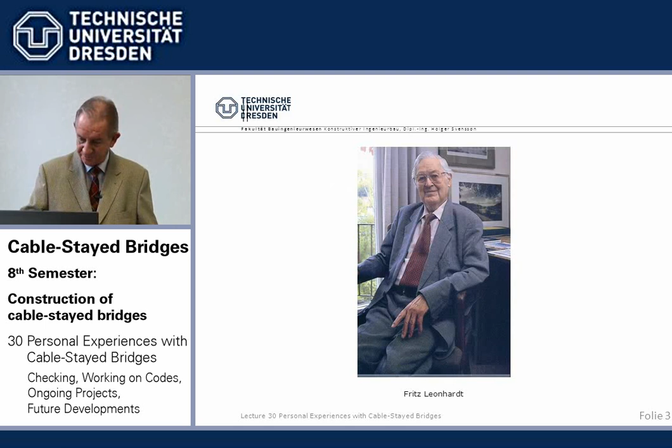Anyway, he got me a job in South Africa with a contractor there, Grinaker, who used the post-tensioning system, and I went down and was a year in Johannesburg in the design office, designing everything from buildings and industrial plants and some small simple span bridges. And then after a year, I said, okay, I wanted to go on site. And then they came up and said, we have something nice in Botswana, a black state north of South Africa.

And what was done there was a copper nickel mine was installed, and our Grinaker and Richard Costain joint venture built all the structures above ground, from rock coming out to 95% in flotation, with breakers and all sorts of things, large foundations, and it was interesting. So I went there for a year. We were 4 people running the site, 3 from England and myself, and that's how we started.

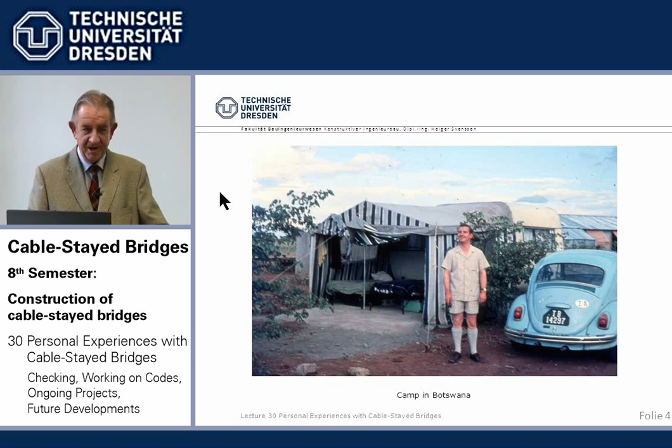First time I came up with my Volkswagen from Joburg. We started in tents. I was wearing there the usual habit, what we call a safari suit. In South Africa, I think it's still used today. So I was 25 at that time. Haven't changed a lot, I know, yes.

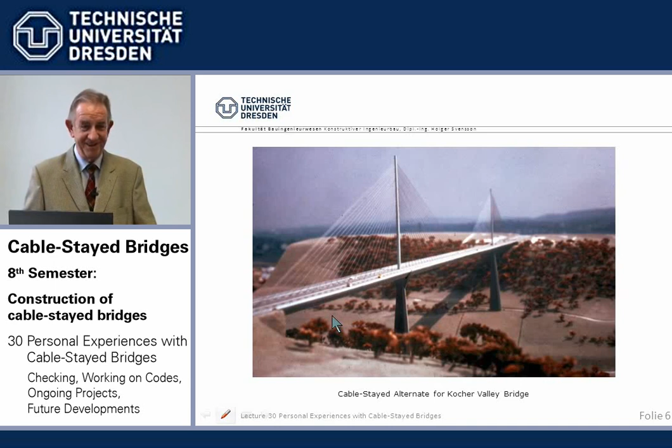And so after that year I came back and started with Leonhardt's office in Stuttgart, first on some German bridges. I've shown you the cable-stayed alternate there. I did the load configurations for stress influence lines by hand. Kernpunktmomente, I told you all about it. Since I did that for 2 or 3 weeks, I never forget it. So I worked on this one early on.

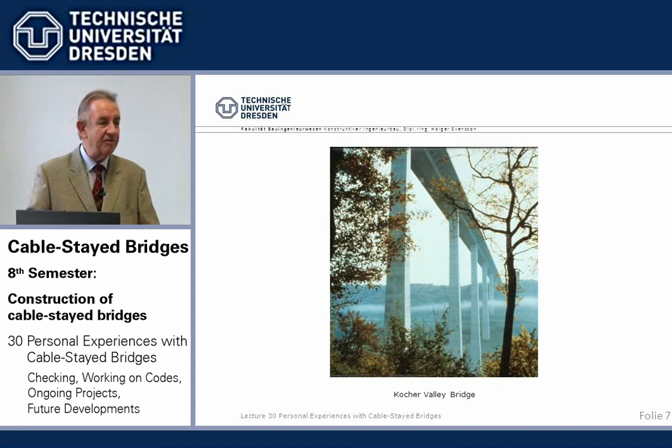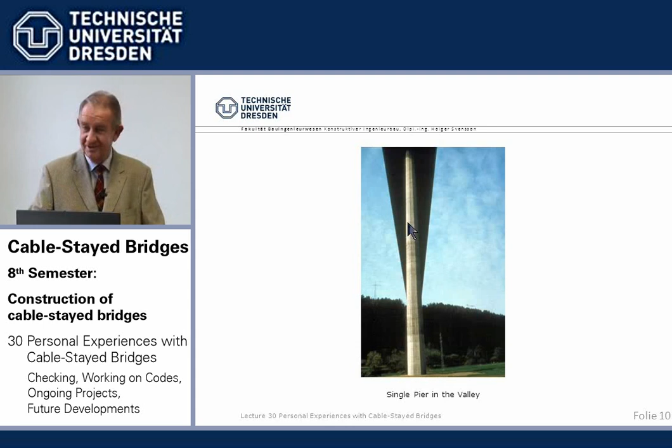Later I did most of the checking for Professor Leonhardt, who was checking engineer for the actual Kocher Valley Bridge. This one, when we could place the piers in the slope. Then came Neckar Valley, I told you, with the underslung side spans. And here we were not too happy when Leonhardt came up with doing a single pier, because we had the tender design ready, and so we had to redo the thing, but he said, no, that's important, it's a beautiful valley, we must open it up. Okay, great man.

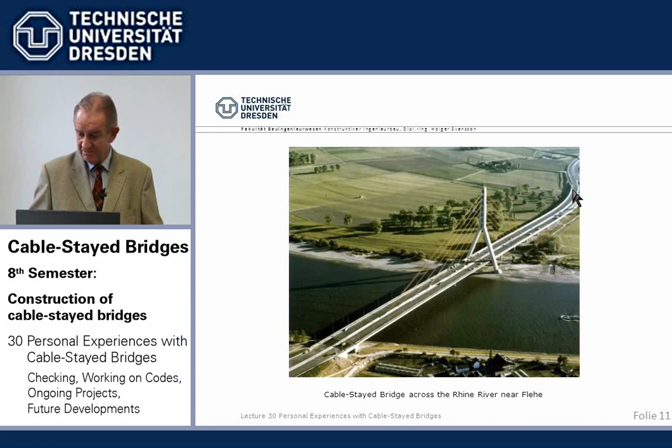Then came Flehe. We did the detailed design for this part, and I became project engineer here. Very interesting. That was built span-wise with 60-meter spans with a self-launching truss. We see here the tower is half up, and some of the engineers which are still busy, and I have contact. For example, the steel part was Professor Weyer, Dortmund, and Professor Albrecht in Munich, where my son did his diploma thesis. They worked on the steel part. I worked on the concrete part. It's all early 70s, long time ago, but one keeps in contact.

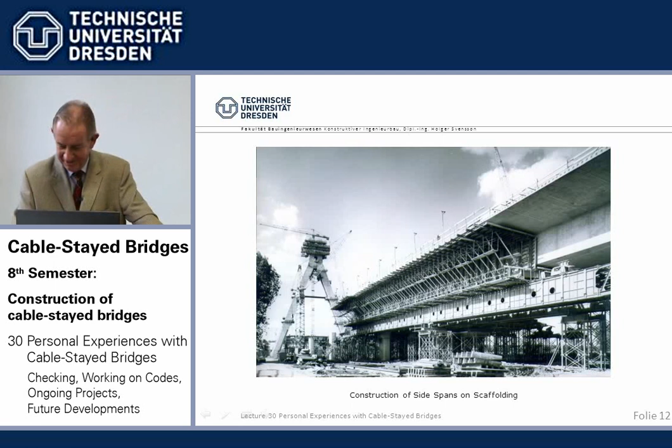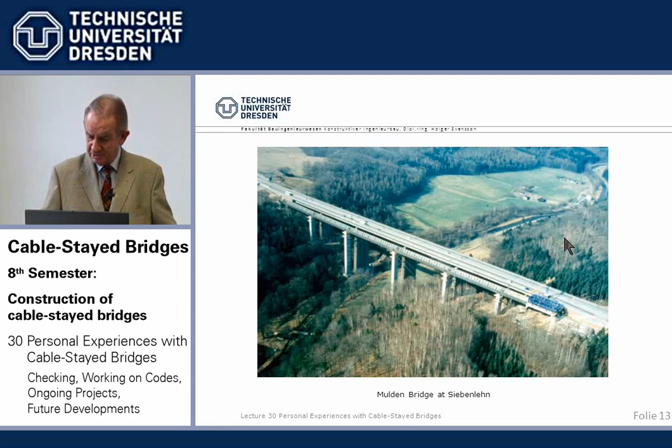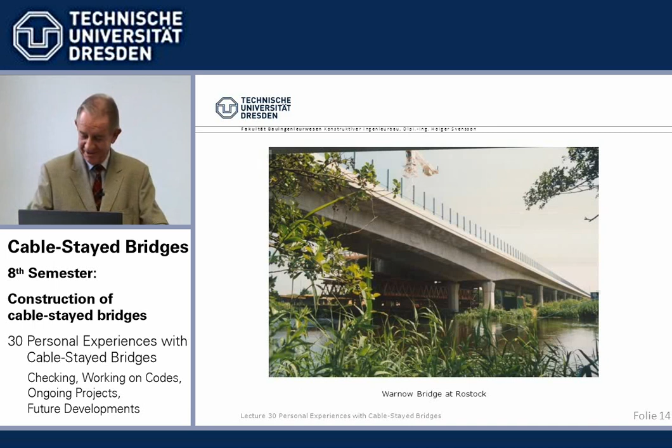Warnow Bridge, A20 at the Baltic Sea, Ostsee, near Rostock. I went for that because after 30 years or so in Stuttgart, I wanted to speak my local North German dialect again, Plattdeutsch. And so we gave in a very low offer, and we got the job. It's a 70 meter span. But I went to all the meetings myself and found some people so I could speak my dialect again after 30 years in Stuttgart.

Finally, I was quite a bit in charge, as managing director, but sometimes I tried to do a little bridge work. Still, if you come from Dresden into Berlin, the A13 becomes A113, and then you come to the Neuköllner Dreieck, the New Cologne triangle here.

Let me look at it. You come, this is the north. You come from here, from Grenzallee, and then you go on to Tempelhof. And that's 4 levels: -1, ground level, +1, +2. And it's completely no crossing over.

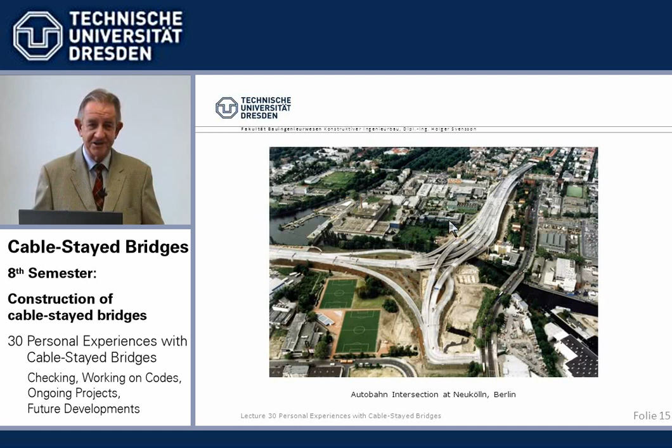And so this is what we used to call in the United States a spaghetti intersection. Not so usual in Germany, but it was quite interesting. And next to it then is this arch bridge, where we said we don't want 2 arch bridges side by side, meaning 2 arches near one another in the center, but we combined the central one into one.

So these 3 have similar dimensions, although roughly speaking these have double plate sizes, continuous roadway slab. So we think that was done for aesthetic reasons, and I think it looks much better than the usual 2 arches side by side, combining them.

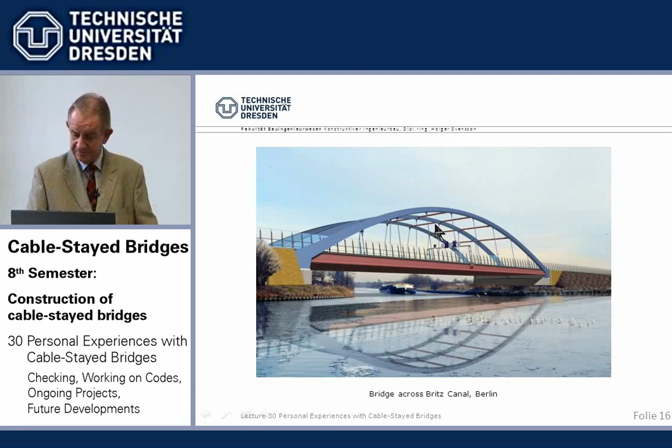Well, cable-stayed bridges, as I said, when I was doing Fleher, I had before 1973 started Pasco-Kennewick, but it dragged on, and we had a design so far, and this small American office was supposed to do the rest. And I was told, well, go there and check and see. In March 76. And when I came there, I saw there was nothing there. What was there you could just throw away, no good. And they had started on site.

So I looked at it and then I phoned Leonhardt and said, listen, I've got to remain here, otherwise we run into trouble. Then there is construction ready and there's no construction engineering. And so he got it organized, and I phoned my wife and said, listen, you better come over here. Our son was 6 weeks old at that time. And so she came, and I had rented a house completely.

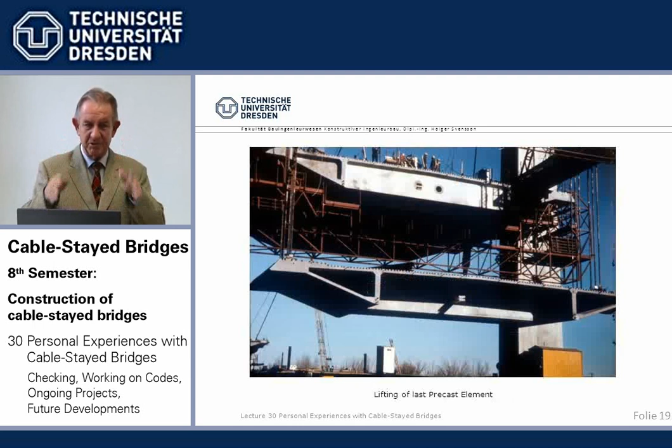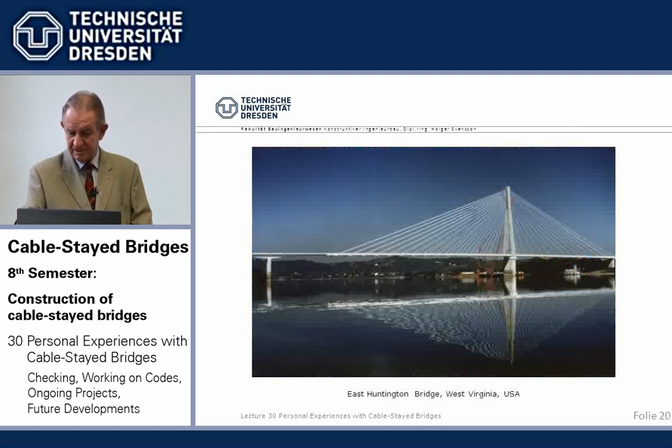But after I had done that, I wasn't afraid of much. We used precast elements because the contractors didn't want to do free cantilevering cast in place, match casting, epoxy joints. I've told you all that, quite new, and it worked beautifully. Then came East Huntington, also like Pasco, a world record for one tower only. There, the two piers were there. We used precast elements. Came Sunshine Skyway. Now we are already in 81.

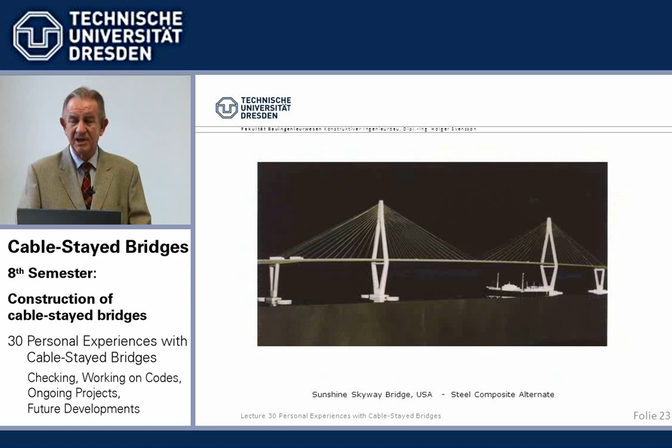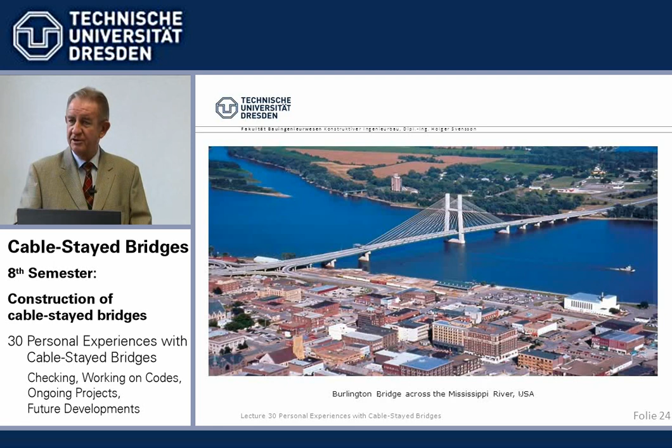15 years, I nearly designed only cable-stayed bridges in the US. There were no cable-stayed bridges. We did the first ones. First we designed them, and then we were in competition, and those we won. So until the end of the 80s, I was mainly designing in the US. Tampa Bay we didn't get. Here we had both alternates, steel and concrete, so small wonder one of our alternates was built, the composite across the Mississippi. And then I told you about the ship collision.

We had to do something for one of our bridges in South America, a protection against ship collision, and I looked into that and found there is nothing in existence, not in code nor anything else, to determine the equivalent force, the impact force of a ship running into a rigid pier. And to design something, you had to know the forces.

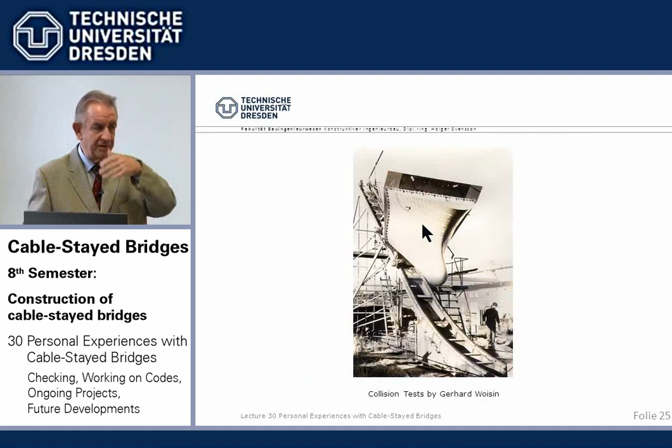These were sizable tests with all sorts of things. And I got to know the engineer who ran it, and because I didn't understand anything of that, I looked at it with a fresh view and made some sketches and found out, which strangely enough nobody else had found before, that the impact force is proportional to the square root of the ship size. Very simple, and some factor here.

And so this formula has been used now all over the world for determining impact force depending on the size of ship. And I used plus minus 50%, which is true, because it depends very much on the construction of the ship's bow. If you have a soft, say an oil tanker, it is rather soft. If you have a cruise ship, it's in the middle, and if you have a warship, it's very strong. And ferries are in between.

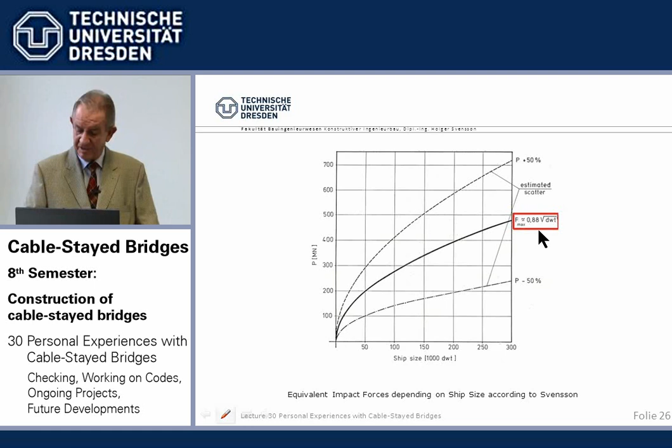It's better to use this as general and say plus minus 50%, depending on the bow structure of the size of the ship. Well, that was, of course, too difficult then, and now it's been used with a 75 fractile, then it's not 0.88, but it's 0.98 and things like that. But this formula, which I found at that time, is now used worldwide.

Sunshine Skyway, I showed you our design, which lost. This was the finally used design by Jean Muller. The bridge had to be built newly because the old bridge was hit by a ship in a rain situation and fell down, 35 people dead. So the new bridge, of course, had to be protected against ship impact by, as we used to say, belt and suspenders.

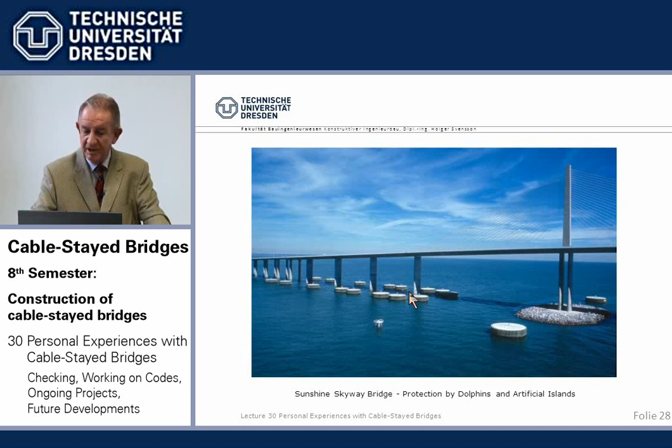And what came out was the main towers were on one hand protected by an artificial island, I told you all about it, plus these dolphins, and the side piers were all deeply protected. But that was the outcome of this little study on ship collision.

Then came the Houston Ship Channel crossing. The Houston Ship Channel crossing, there was a tunnel which was too small. And you see here, that's Houston, Texas, oil producing area, right in the middle where all the oil is processed. Non-US oil comes in from the Gulf of Mexico through the Houston Ship Channel into the refineries here. And so there's a lot of petrol trucks going over there. And a lot of space required, and we looked into it and found, okay, we'd rather make two separate beams. I told you about it, separate towers.

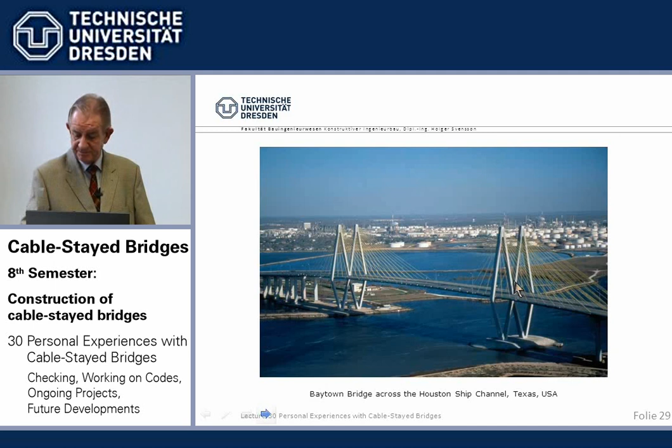It's a hurricane area. I went through a hurricane there. I went through 3 hurricanes in Tampa, Florida, where we were supposed to be evacuated, but I didn't. We had a first floor there. I said, well, if we are flooded, before I get wet feet, I sit in the first floor. I never went on the road, but we were 3 times asked to evacuate, so I know about hurricanes.

And here, for the construction, the governing load was a hurricane, which is 210 kilometers per hour, 230. Not quite as much; Helgeland was 270, more. But 230 is quite something. And so we did free cantilevering to both sides, and for a hurricane, it wouldn't have been stable. So we tied down, I'm not sure you can see it.

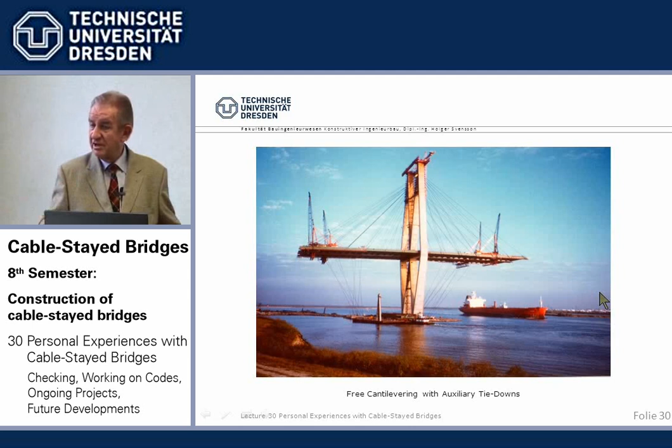Yeah, you can. There are tie downs, temporary until closure, against hurricane, and a heavy hurricane went smack across the site before center span closure, and the bridge behaved as designed; it was measured, 1.7 meters plus minus up and down at the tip, but everything was considered. So it worked very well. I told you already about the coloring we took into account, so I don't have to go into that much more.

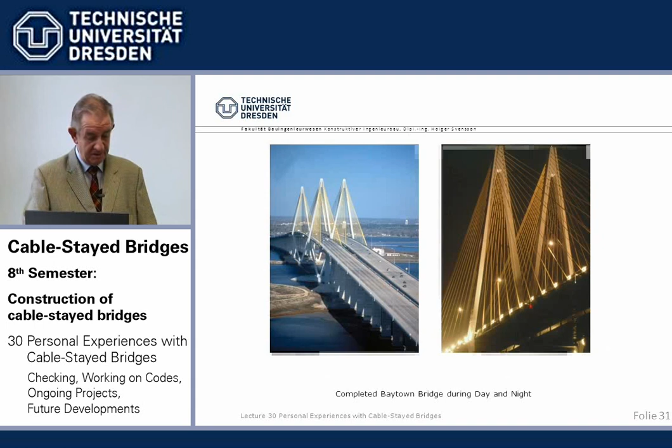In Columbus, Ohio, the Scioto River runs right through downtown. It's partly developed, and there are three major true arch bridges, series of arches underneath. And one of them was obsolete and had to be replaced. And we got the job together with a local Burgess and Niple company. And there was a concerned citizen committee, as is everywhere now in the US, and there were workshops where all the good citizens of Columbus, Ohio could come in and tell what they wanted.

What's now being found out in Stuttgart as public involvement, we did already 20 years ago in the US. And they said, no, we want a slender bridge. They said, no way, we don't want a highway bridge, we want an inner city arch bridge. Yes, but a true arch they couldn't pay for. So Leonhardt finally came up and said, okay, we do what we call a plate arch.

These are actually just plates, deep haunched girders, 1 foot thick, 30 centimeters, with a haunch. If you look here underneath, there's no arch in between. But they look good enough as an arch, and they were payable. And so that's how this, I think, very nice, they had

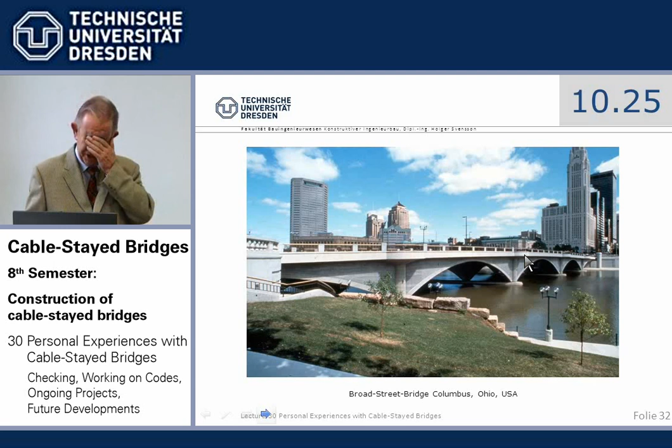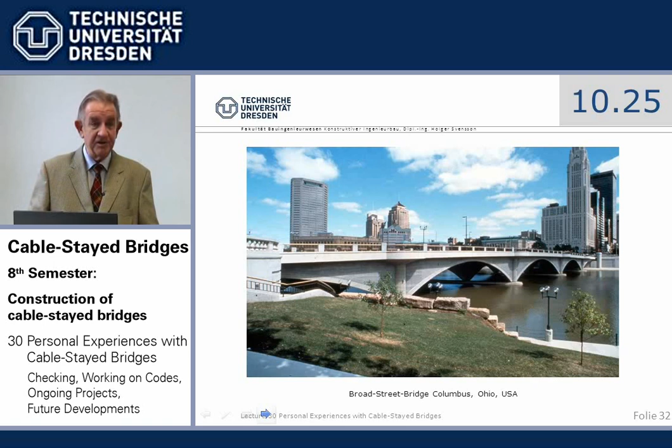good architect, what was his name? From H2L2 architects, former or original Pole from Poland, Tom Piotrowski. He was the architect there. He's now head of H2L2. So I think we made a nice bridge together with the concerned citizens of Columbus, Ohio.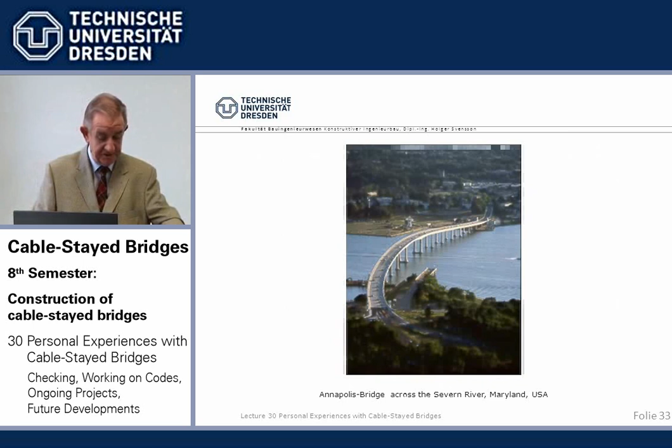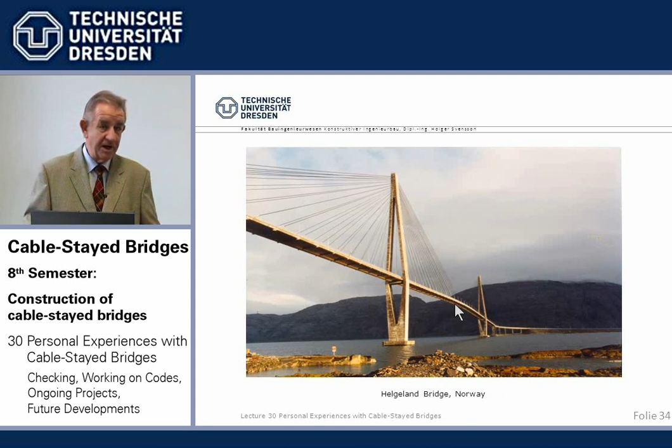Then came the big competition, Annapolis Bridge, I told you about, where I think we won because we respected the history of the Annapolis Academy. And then came what I personally call the most daring bridge I've ever done. I told you all about it. 425 meters, 1.2 meters deep. West coast of Norway at the polar circle with real heavy storms.

This is here a picture early in the beginning, and that is, in German it's called Gischt. The water drops being pushed up by storms 250 kilometers plus. But it worked. It still stands beautifully, and of course the most critical part is just before center joint closure, where we had here 210 meter free cantilevers. And every winter, or from fall to spring, 2/3 of the year, there are these heavy storms.

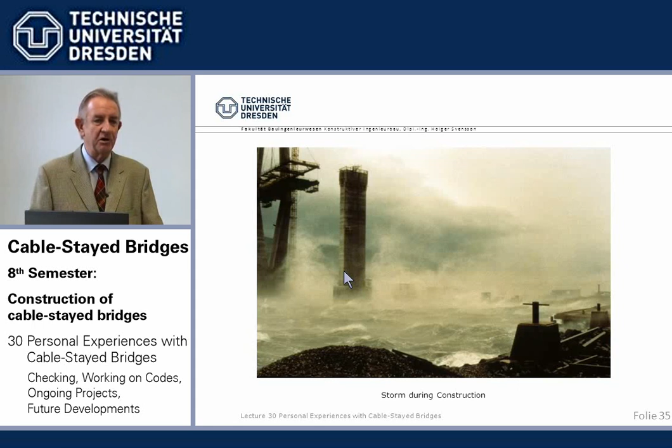And I'm not sure, knowing what I know today, whether I would have dared these skinny dimensions we did at that time. But Dr. Kovacs did all the aerodynamics and said, it works. And I believed him. You can't do more with this voodoo dynamics these people do. As a regular engineer, you can't really understand and check. You have to believe somebody. But we've worked so long together, and he was right. It worked. But I'm not sure I would do the same again today.

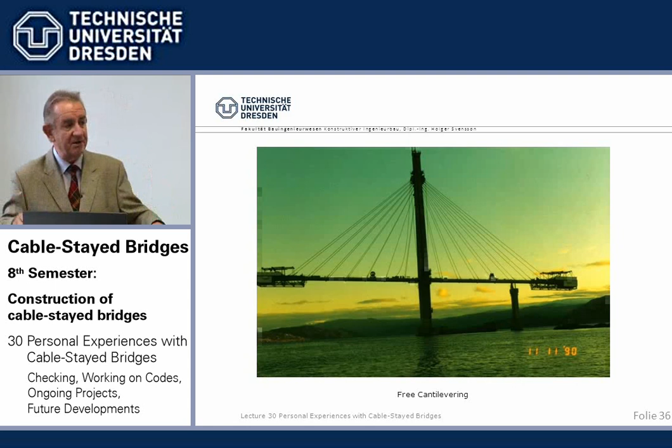Of course, there was also beautiful weather, and free cantilevering then to both sides, cast in place where we had the final cable supporting the traveller. I told you all about it. Then, now here we go. Scotland, here we come. Leven River Bridge at a new town north of Edinburgh.

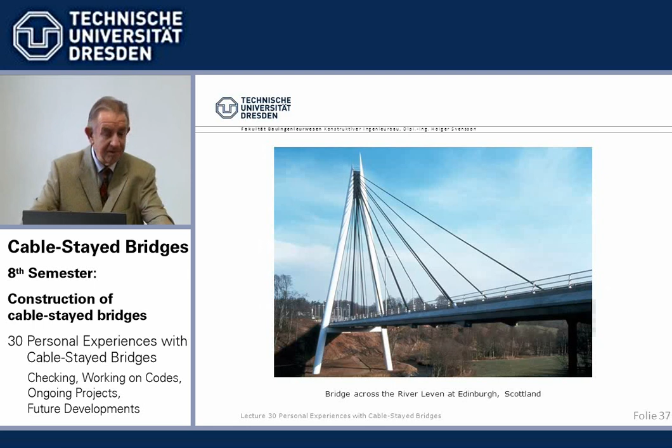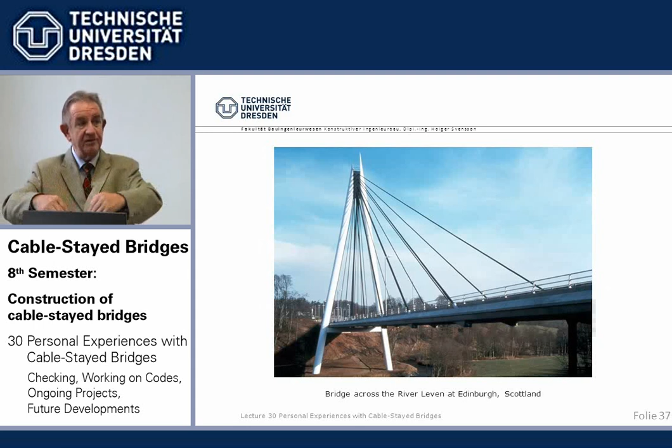We did it with an architect, completely built on scaffolding, no post-tensioning, taking into account cracked section under service life load and load redistribution then for the cracked concrete section. Normally we have post-tension, then there's not much cracking. But here it was only reinforced, so we had a lot of cracking, a lot of redistribution of moments. That was a special thing here.

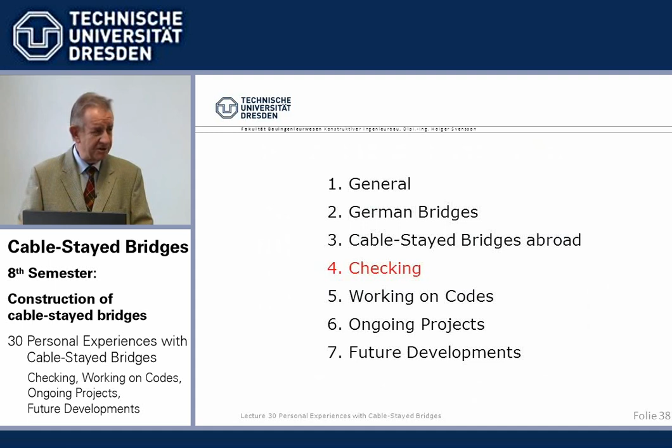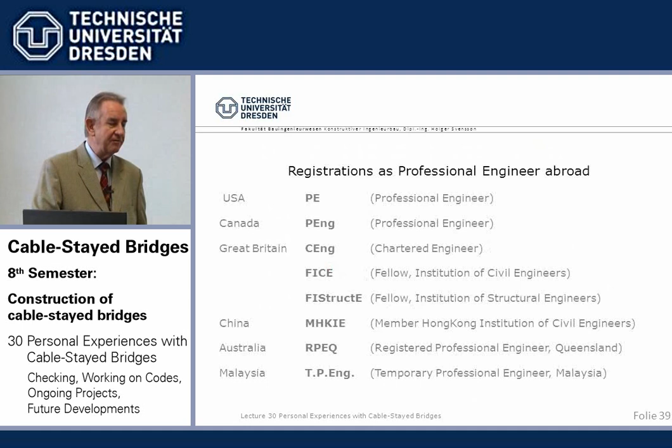Well, in addition to designing, one can't avoid checking. It's not a real interesting job. I'd rather design a structure than check it, but sometimes one has to do it. And I could not become a checking engineer in Germany because for that you have to show 10 buildings. And I was never considered clever enough to do buildings. I was restricted to bridges, so I could not become a German checking engineer. So I did all my checking abroad. And for that you need a registration as engineer there.

For example, I started PE, professional engineer in the US, which is, after getting your degree, accepted and all that. It's 2 written examinations, 8 hours each. And I did that back to back, Thursday and Friday. And after I passed, my colleagues in America said, well, maybe he isn't as stupid as we thought, because the PE exam in this way, back to back, is not normally done in the US. You have some years between.

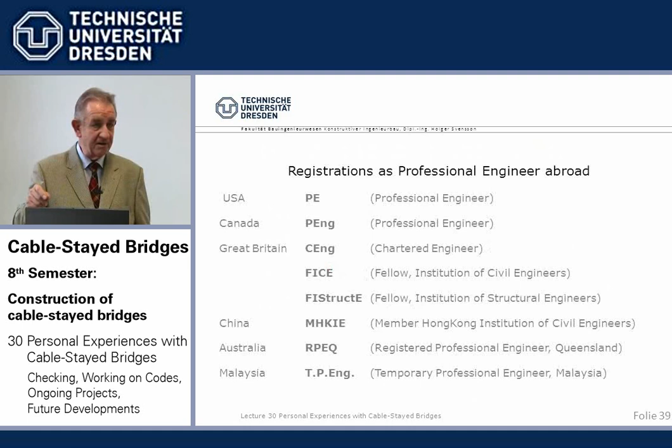Canada, I had to do an additional on Canadian law, which is basically British law. The House of Lords is still the highest appeal in Canada and things like that. In the UK, I had 1 hour verbal, 1 hour written. And after you've become a chartered engineer, you can then become members by the civils and by the structurals. China and Australia and Malaysia, they then believed me, and I didn't have to take exams for that. So in all these countries I've checked, I've designed. You must have that in order to be able to sign a drawing, and to be a checking engineer where you also have to sign.

Roosevelt Lake Bridge in Arizona, right in the middle of a desert. We did a major bridge because that's a dam, ein Staudamm, there in Arizona. An arch was done and we were checking, and the engineers had never done that, the contractor had never done that. So our checking was more to tell them how to do it. But anyway, it worked out quite nicely. And you see, it's a 310 meter span, something like that. And tied back free cantilever. It was an interesting thing.

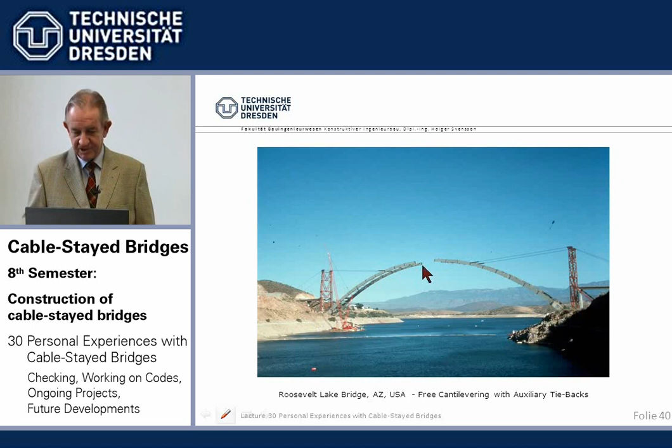Norway, Svinesund, across Norway and Sweden, we had a design for an arch bridge, but we didn't win. Bilfinger's design won, Bilfinger and Berger, and they had to bring a checking engineer to check drawings. So they have to pay the checking engineer, but he has to be accepted by the state.

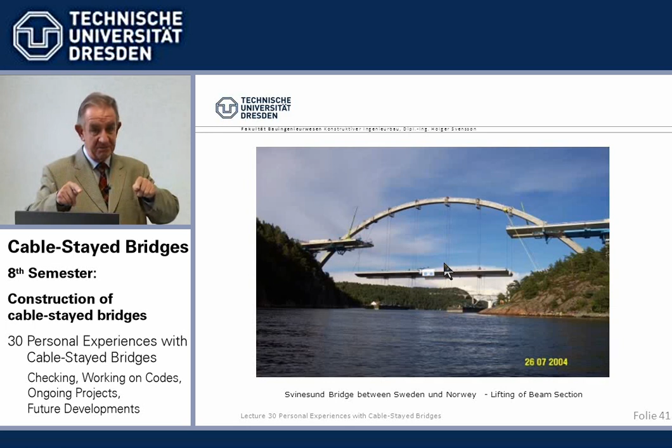And since I had worked in Norway and Sweden, and from my name, Holger Svensson, I was considered an honorable Scandinavian. It's 150 years ago that my great-grandfather came from Sweden to Germany. And so I became, with this and other bridges in Sweden, checking engineer. It was very interesting because it was a tricky job, slender arch and two independent box girders, and the torsional stiffness of the whole structure came from the torsional stiffness of the two beams. Was interesting.

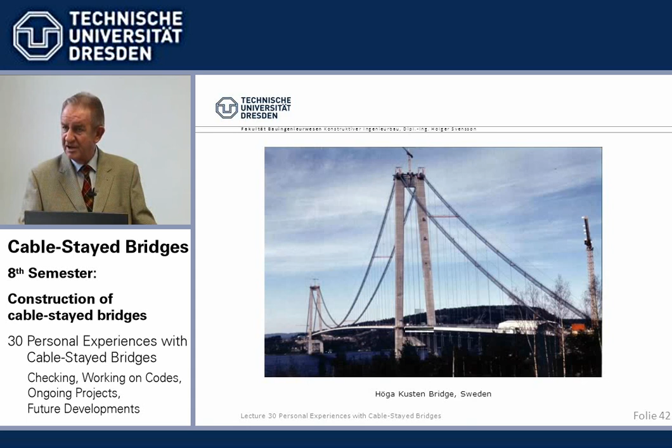Then came Yangpu checking. The World Bank was supposed to give a $100 million loan to China to build the Yangpu Bridge in Shanghai, 602-meter main span, world record at that time. And the World Bank said, that's okay, but we want to check it. So they had three checking engineers: Walt Podolny, chief bridge engineer from the Federal Highway Administration in the US, we knew one another well, plus the Japanese. We checked all that, and it was very nice.

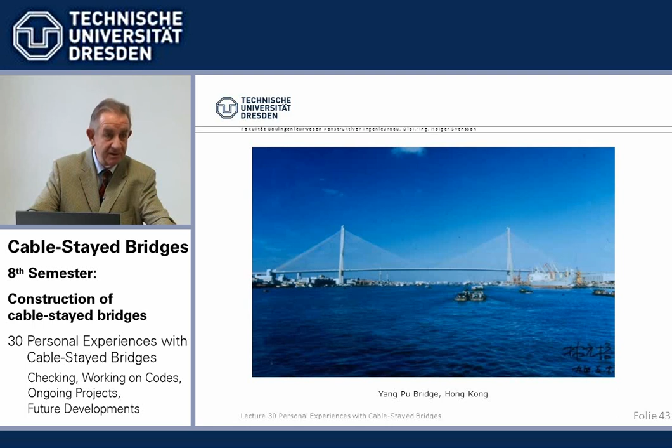And at the end, I had to give a TV interview after the contract was signed. They asked me about the impression. I said it was very well done, we had very little to criticize. However, I say that with a laughing and a crying eye. Laughing because as a checking engineer you are happier if you can sign it off than if you have to say no good, do it again. Crying because I saw no jobs for my company Leonhardt, Andrä and Partner. They can do it themselves. And that's what it was. We've never had a major job in China.

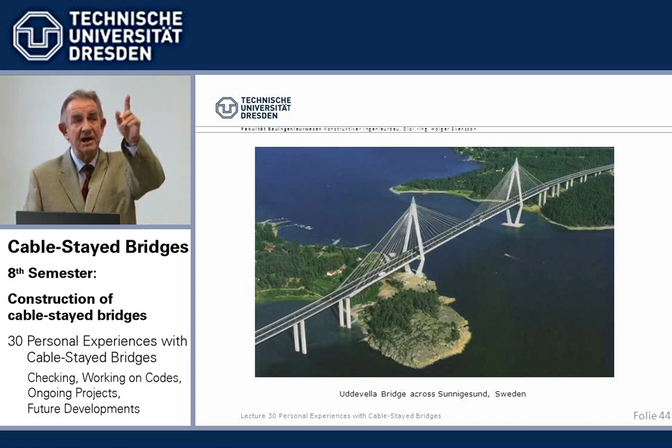Sweden, Uddevalla, we had a design with Skanska, I think, but weren't successful, if I remember correctly. But I got the checking, so we worked on the checking of Uddevalla. That's also along the coast from Malmö up to Oslo, E6. Ume River, another cable-stayed bridge where I was checking engineer.

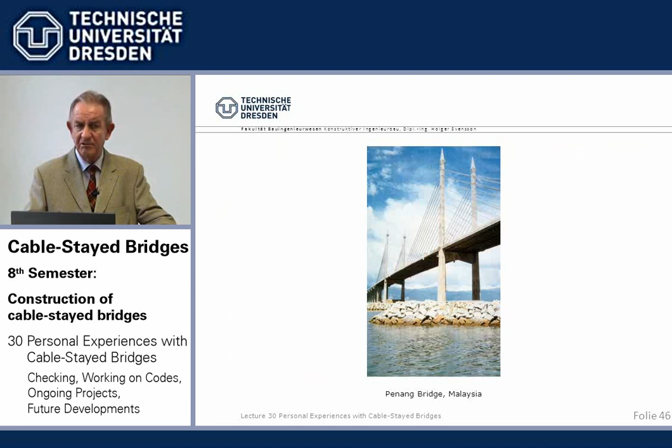Interesting was the Penang Bridge in Malaysia. Penang is a major island in the north of Malaysia, where it then goes into Thailand. And it's been for many years a holiday resort. And so to develop that, in the 70s I think, the Penang Bridge was built. And we checked it for new loads, and finally it came out okay, reinforce it somehow, but otherwise it was okay.

Golden Ears Bridge in Vancouver, Bilfinger design, where I was checking engineer. Last year, I think, it was opened. Interesting because it's a difficult earthquake situation. You can imagine going up California, up into British Columbia. It's not the San Andreas Fault all the way, but it's highly earthquake prone.

And the solution here, which you may recall, hopefully, from Rion-Antirion, was that between the soil and the foundation there are something like two layers of aggregate, which in an earthquake permit plastic sliding. That was also used here, and we had long discussions, due to the time difference around midnight, telephone conferences with people in the US, in Canada, my geological specialist and so on. But we accepted it, and hopefully it works.

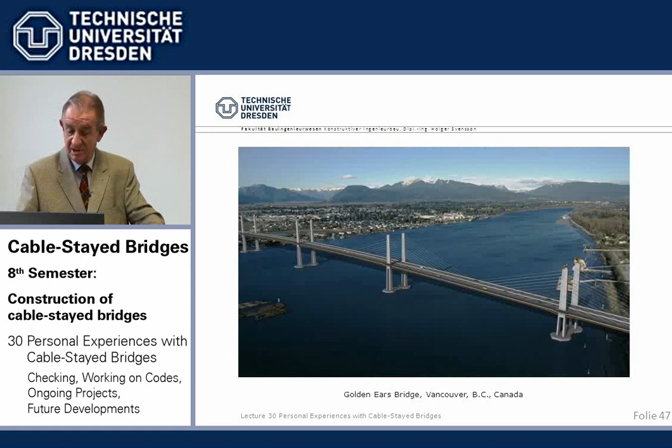I've worked, and then we'll stop, in the US. In the 15 years I worked mainly in the United States for Leonhardt. I was, of course, then in code commissions. We did the first code for parallel strand and parallel wire cables within the Post-Tensioning Institute, which is now part of AASHTO. We did the first guide specification for vessel collision design. I had worked on that, so I was in the AASHTO committees.

And we did the first segmental concrete precast elements, but actually it wasn't that. The main point was the first box girder code conditions, because there was nothing in the US. You used the single span AASHTO girders, and that's it. So these were important new codes which were incorporated into AASHTO.

And I think that will give you a rough idea that I had all sorts of interesting jobs to do, and I've stuck 40 years to what I said at the end of my school days: I want to design major bridges all over the world. And I'm very thankful that I had this opportunity, and I wish you, this is the last lecture we have together, that whatever you want to do, whether bridges or buildings or it doesn't matter what, that you find an opportunity and that you like it as you hope to do now, and that you stick to it. I wish you all the best.